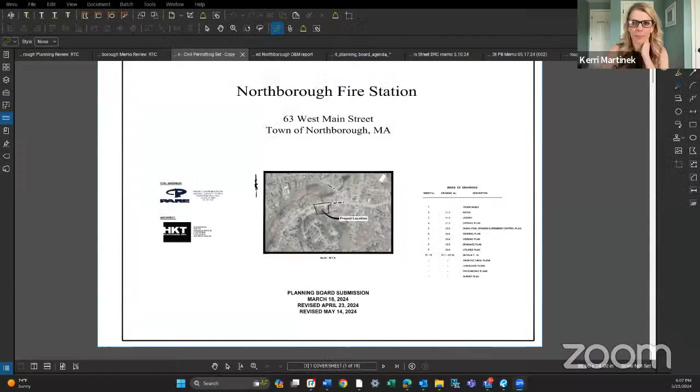When we last left off, we took a look at the plan and we had some items that were going to be looked at for revisions, and then come back tonight and take a look at what those revisions consist of. So if you want to start there with the revisions from last time, that might be a good place to go. Okay, yeah, I can go through the plans that were revised. Is my screen sharing? Yes. Okay, yeah, so we did submit revised plans on May 14th and written responses to all the comments we had received. So for the plan revisions, I'll just go through them kind of one at a time.

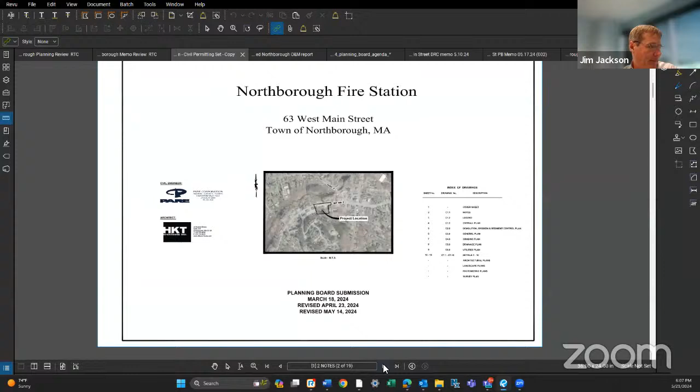One of the comments was that we weren't showing the existing utilities on the 100 scale plan, and those have been added to the overall plan, so we do have that covered now.

Next comment was regarding the crosswalk. Originally we were talking about removing this crosswalk, but based on the discussion we've decided to keep it as is, so we've taken it out of the demolition plans.

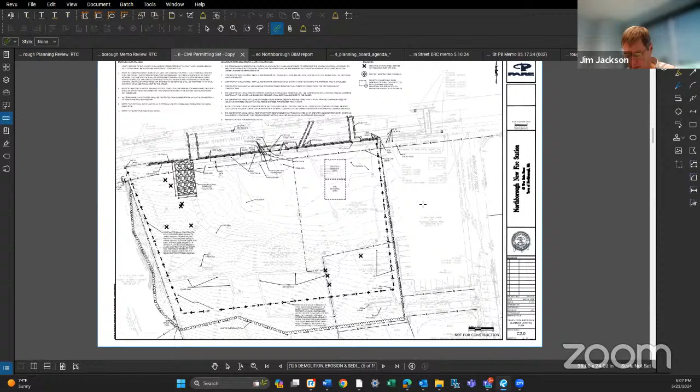We had a comment on marking the public parking. What we did over in this area is we've added a public parking sign at the entrance to the public parking.

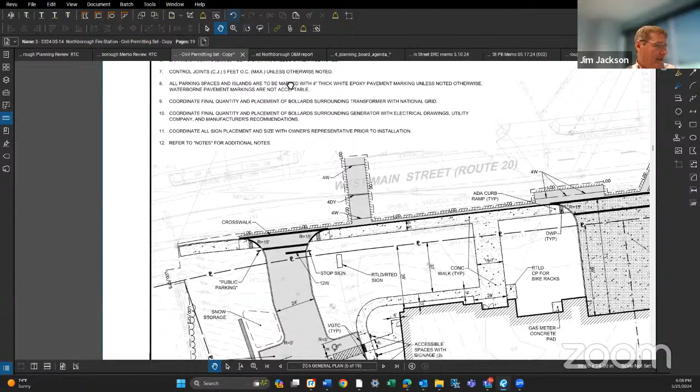And then we have marked 6 of the spaces that will be reserved for fire department use, marked with signs - that's 1, 2, 3, 4, 5, 6 spaces restricted just for the fire department. Then there'll be about 30 spaces open to the public, and of those 30, 3 are ADA accessible, and there's also 4 EV charging spaces. So the ADA spaces and the EV charging will be shared by the fire department use and public use.

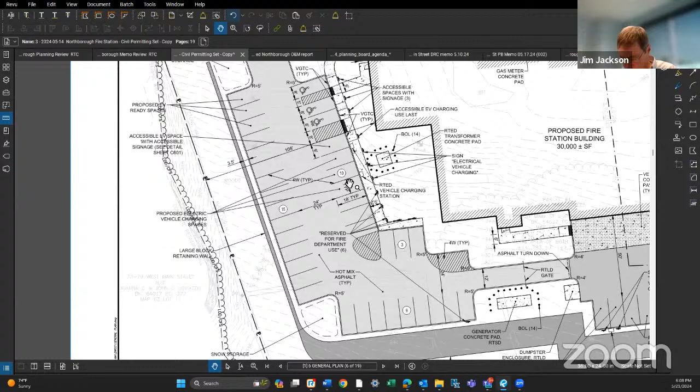Grading plan - we had to raise the curb height along the east side at these entrances, so we've raised that to 7 inches.

There was also some discussion about revising the grading along the Hillside Grill property. The fire chief and DPW director have discussed this with the property owners. It's not finalized yet, but we've discussed doing some grading on their property, which lowers the height of this wall along the west side of the property to about 20 feet - a significant reduction in wall height. We also did the grading between the 2 properties.

Did have a question on the landscape plans. Any questions from the board? I have a quick question.

Are you saying that the abutting property has agreed to the grading plans that you guys are doing? It's been discussed with them - I know the chief did discuss it with them, and I think there was a positive response. I don't think there's any final formalized commitment from either side, but it has been discussed and it seemed beneficial to both sides.

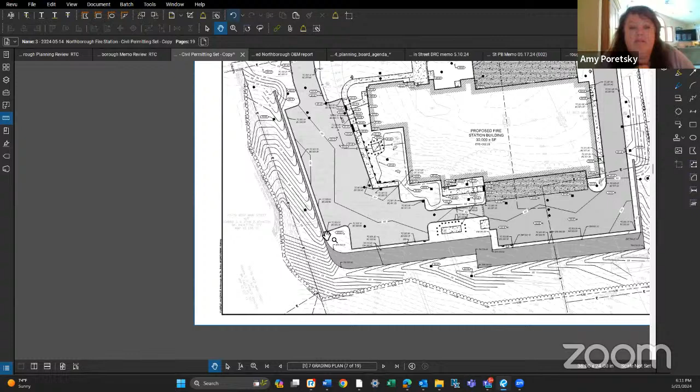And how far does it taper down as it gets to the road? It basically tapers down to really nothing, just a couple feet high, and then the grading takes over.

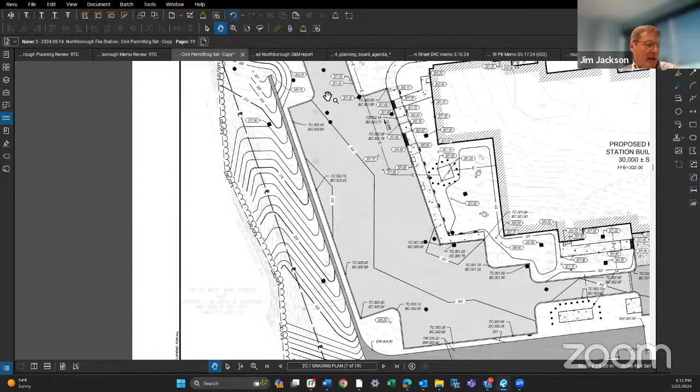So at this corner, would you have to do anything with the pre-existing sidewalk, or not? Right now we're showing the existing sidewalk - the proposed sidewalk is right along the roadway. When you say existing, do you mean the Hillside Grill existing sidewalk? Yeah, we're not showing anything on our plans for that.

We did see in the draft order of conditions there was a condition where we'd be required to extend the sidewalk down to the driveway. I think we'll discuss that tonight, but we haven't changed our plans for that yet. But if that's in the order of conditions, that would need to happen. Thank you.

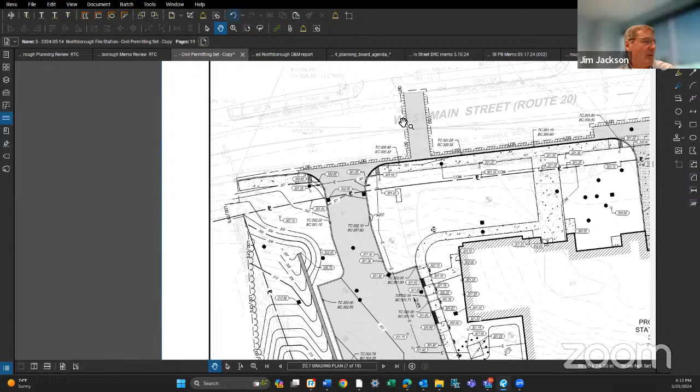Now, is that a crosswalk right in the front too? I know Fred had asked questions about crosswalks and I see one right there. So there's no - this is just repaving for utility connections. We aren't adding additional crosswalks, we're just going to keep that existing one.

So originally you were going to discuss crosswalks with Fred. That's what you discussed with Fred, and he also thought that was fine? Yeah, we discussed just keeping that one, because at the time he made the comment, we were calling for removing that one, and we discussed it with our traffic people, and they felt it was okay good to keep it.

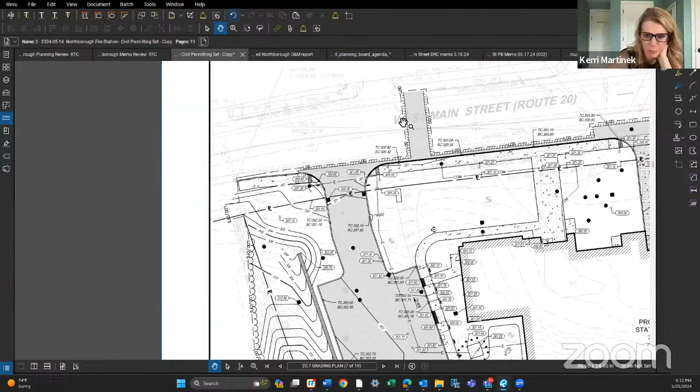Can you point out where the crosswalk is? It's over by Avidia, down by the bank. So there's no crosswalks in front of the fire station? No, there won't be one in front of the fire station.

We were thinking it was too close for the mid-block crosswalks. It's not in an intersection, so the traffic engineers try to limit those, because they can disrupt traffic and be a little more dangerous.

While this was up, I noticed Fred had a comment about lining up the driveway with the driveways across the street. Did you guys work that out? Yeah, so that was on the draft order of conditions, and we did want to discuss that tonight.

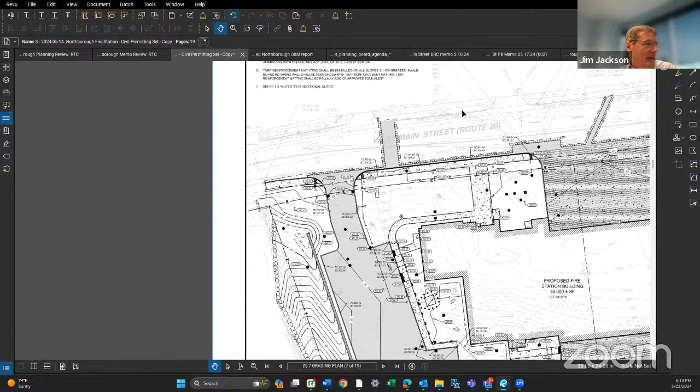And that's in this area, so here's where our driveway is now. We haven't done any revisions to the drawings, and here's where that Dunkin' Donuts driveway is. There's actually 3 driveways that serve Dunkin' Donuts. There's this one here, this one here I think is an exit, and then right at the edge of the page there's another one, I think the exit for the drive-through.

And we're kind of lined up offset from this driveway here, and that's what the comment was. They'd like to see it straightened out, and we can make it happen.

We just didn't think the alignment was great, so we'd have to put a bit of a turn. We want to hit at 90 degrees to West Main Street, so we'd have to come in like that and then cut back to get back to our parking area. It was a little bit awkward. It could be done if it's required.

We were hoping to wait until we got to the Mass DOT permitting stage and discuss it with them, and then if they recommend it, we would follow through with it. But if they don't really feel it's necessary, maybe it'd be better to keep our alignment a little bit better in and out from our site.

So Lori, any insight on why Fred suggested the non-emergency driveway access should be aligned with the driveway across the street? Do we know why he wanted that? Yeah, he and I discussed it. Personally, I like to see driveways offset, so I questioned him why he wanted it directly across from this driveway.

And he thought there would be a significant enough volume of traffic going between the two facilities. He was also concerned about the cross movements and the potential for collision. So if somebody was to cross the double line to go into the fire station versus cross the double line to go into the Dunkin' Donuts, and they weren't paying attention, he was concerned they might collide.

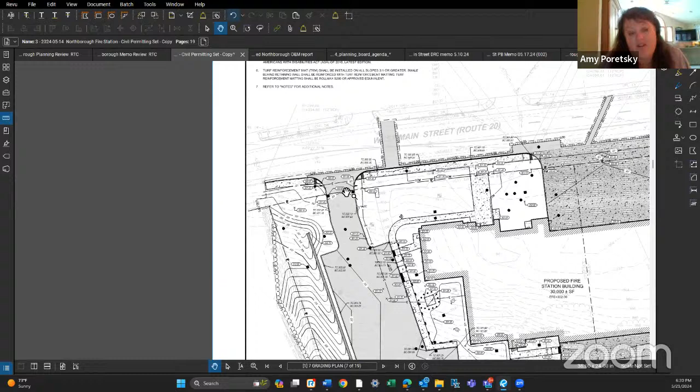Yeah, I've had a lot of experience with the traffic engineers from Pare, and I find them to do really quality work. Because they're working for the town, I would expect their opinion would be based on protecting the town. So I personally would feel comfortable with that. Would it be okay if they also talk to Fred? I hate to override the town engineer. Maybe they could talk too—that could be part of the condition, that Fred is in agreement.

And there will also be the Mass DOT review of all the curb cuts, so they do have to approve those also. They want it aligned, we would say.

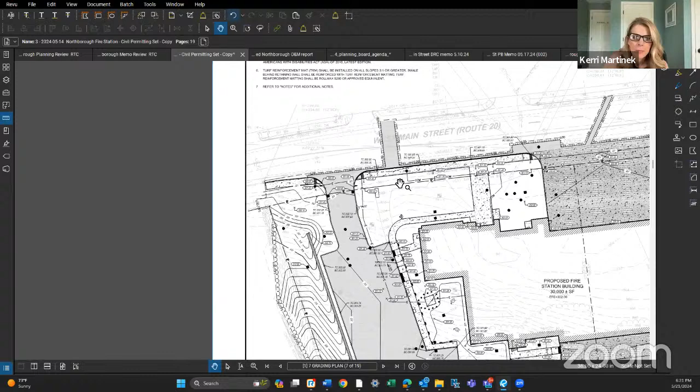Okay, anything else there? Yeah, we did make some revisions on the landscape drawings too. We changed the fence to 5 feet high, and we also added some detail for the dumpster enclosure. So we're proposing this block and brick structure with solid gates.

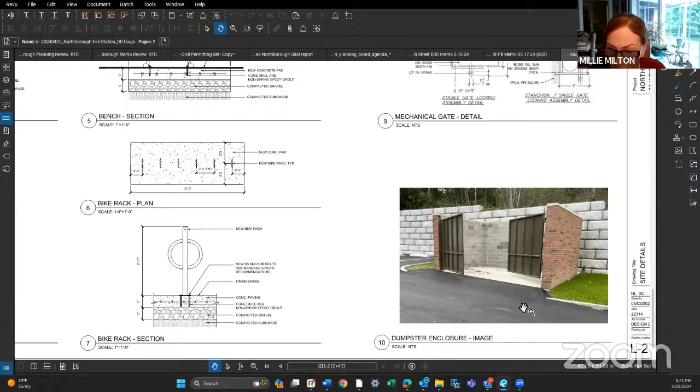Can you show where the monument is? Is there a monument or memorial image showing where that is? Let's see—this memorial, so on the plan, maybe at the front of the site. Yeah, the memorial will be right here at the entrance. Okay, I didn't see that. Okay, I see it now. Got it, thank you.

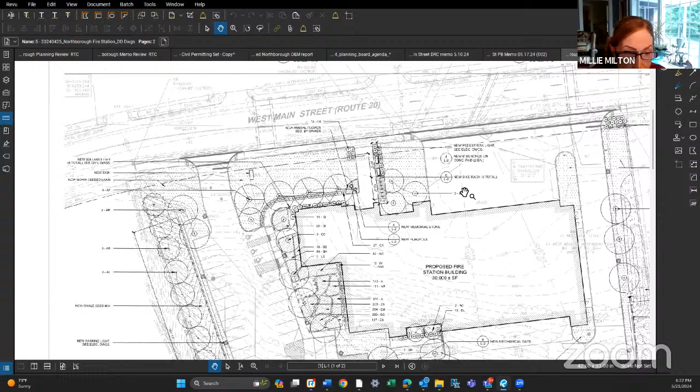And I believe that's the significant changes that we made to address the comments. I know we can't see everybody, but I just saw the chief had his hand up. Oh sorry, Chief, do you have something you want to add there?

No, Kerri, I was just going to point out that that's the memorial that currently sits on the corner of Church and Pleasant. I spoke with the Eagle Scout about the project, and he's all for moving it. I just need to finally connect with the Scoutmaster, hopefully do that Memorial Day since we're walking with each other, and get their approval. Our intent is to move it—I think we'd get much more traffic there as opposed to where nobody sees it.

Okay, so I see you also submitted responses to comments, and on top of that Fred had his comments based on your comment. So did you have a chance to see what Fred submitted? Is that the right order? Did I get that order right?

Yeah, we saw Fred's original comments and discussed them with him, then sent in a written response. I don't believe we've seen a response to our comments. I'm sorry, I thought I sent those over—I can send them now. The few outstanding comments were included as conditions of approval, and I definitely sent the draft conditions over for them to review. Okay, so Laura, you had this all covered. Hopefully. Yeah, we do have the draft conditions of approval. There were a few we'd like to discuss, but most of them were fine.

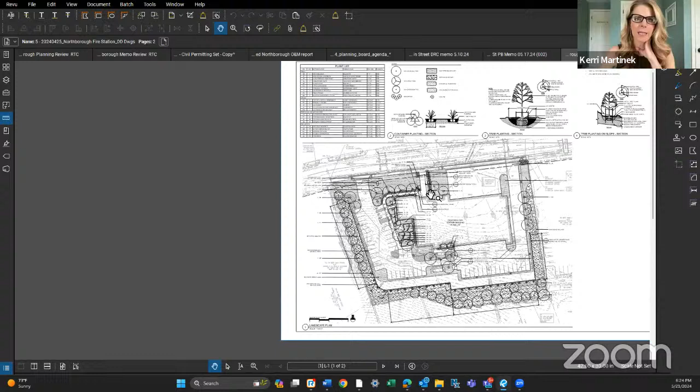Hi, we do have on the drawings, we are calling for snow guards on the roof, on any of the sloping roofs. So there would be both pipe rails and pad style snow guards that would prevent snow from sliding off quickly and causing any issues below.

Did you also say that the doorway is set in from the building? Yes, that's 4 feet deep, correct. Yep, the doorway is set back 4 feet from the facade, so someone steps into the protected covering before they open up the door.

I could also speak to the design review concerns. I know there are snow guards, and I think there are snow guards on top of 4 West Main Street too. But when there's a big snowstorm, they still had to put up all sorts of scaffolding, and it's concerning because there are metal roofs, even though there's snow guards. I was up at UNH once, and they had to put fencing and signs around, be careful, because when the snow slid off, it was like it could have killed someone.

Yeah, and I did drive around and take pictures of structures. I went up to the Westboro Fish and Wildlife, and they have roofs, similar metal roofs that slope this way, and they had a building that jetted out over the roof. Part of their building jets out over the walkway.

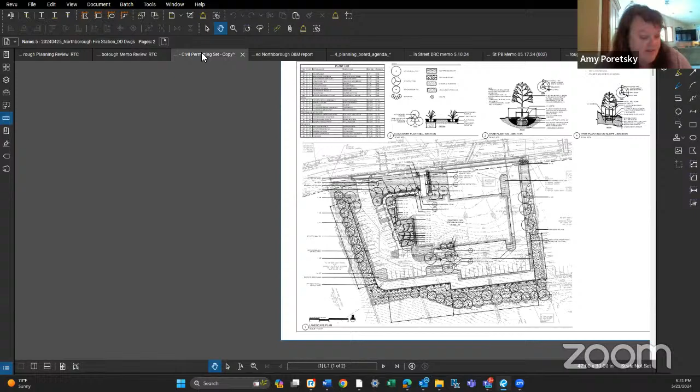How about the apron on the front of the building—is that 65 feet from the road to the building now, to the doors? Janet, do you know? From the road, edge of the road? Yep. I think it's about 65 feet, but you see how it has all the dots on it now?

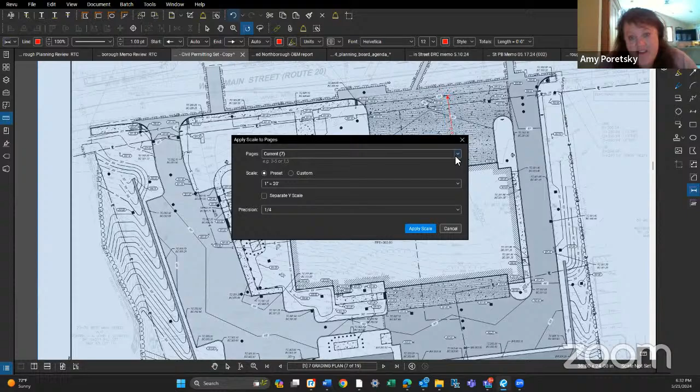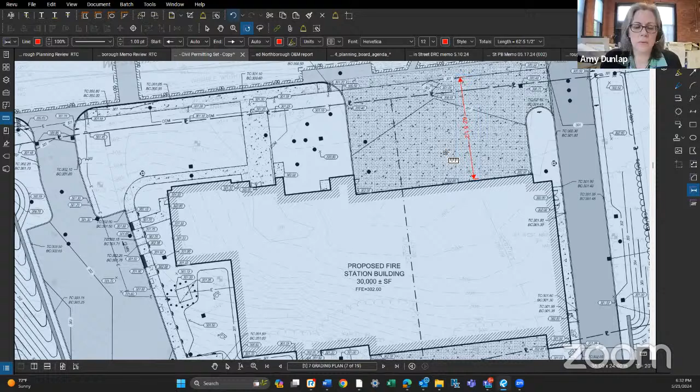Does that mean that whole area is now going to be heated? No, that's the concrete, so that'll be a concrete apron as opposed to the gray over here that's bituminous. So it just means it's concrete. Do you know how many feet of that will be heated? If I could, it's 10 feet on both the front apron and the rear apron, that's what we have discussed with the department.

I was just thinking because we were talking snow removal, so I didn't know if all those dots meant you were going to heat the whole 65 feet.

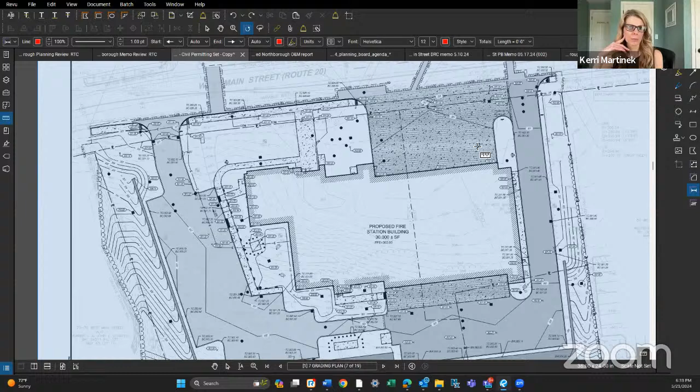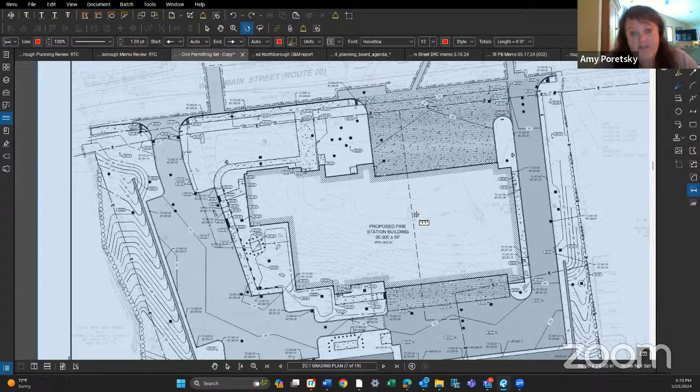Okay, let's see. Anything else, Amy, from design review? I think that's what's on the letter here. I don't have the letter in front of me. I just know that it seems a little tight. We had concerns about the height of the wall and the whole site itself being pretty tight. But I think I have the letter if you'd like.

So the first comment is a recommendation to waive having the grass strip in between the sidewalk and the roadway, Route 20. The second issue is about the wall, safety and aesthetics. We appreciate the fence was adjusted to be 5 feet tall, but overall the wall is a concern. The third comment is the site looks tight for snow storage. We would recommend a letter from DPW agreeing to snow removal if necessary, and also would request review of the water retention diversion systems to make sure they are optimal for the site.

So both Fred and Vinny have been looking at the stormwater systems, and there are some conditions related to comments received from those individuals. And number 4, we discussed adding a protective structure over the door. So that's what we've already discussed. So just those 4 comments.

Okay, Amy, anything else from your perspective? No, we had other comments, but the fire station building committee had already made their decision, so we couldn't go backwards. So those aren't even probably worth going into. This is the design that was brought forward to us.

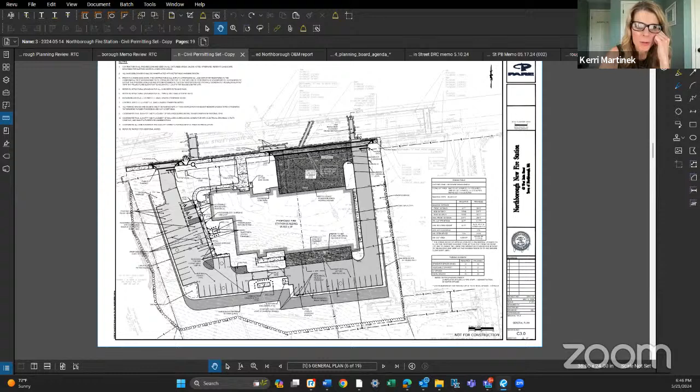Right before Dunkin' Donuts entrance. Is it before the entrance or at the entrance? Sorry, I can't see, is it between the two exits? I can zoom in a little bit. Okay, so the merger of the streets is actually between the two exits.

So at the same time, across the street from the driveway is the merger of two lanes. Yeah, that's a little messy. I just think site-wise, that's a concern.

Because you always have somebody inevitably who wants to speed past the people going into Dunkin' Donuts. So there's that, the speeder going past that. And there's the merging of the lanes where people also try to speed ahead of anybody going slowly. And you have people coming eastbound trying to get into Dunkin' Donuts.

I was going to say the same thing about blocking off the fire station entrance, because you can't well get in. Not only that, but you get people coming eastbound saying 'oh there's the Dunkin' Donuts,' looking over and not realizing there's a building and cars coming out on the other side. I think this is a tricky spot.

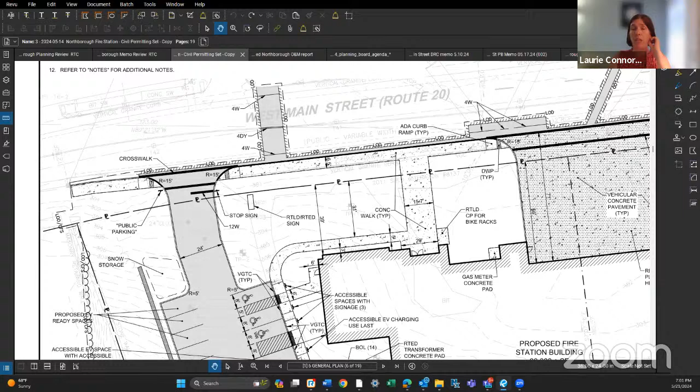And for the public, I wonder if Jim could speak to how they enhanced the vegetated buffer to address the comments received from 20 Monroe Street at the last public hearing. Sure, I can call up the landscape drawing. So here's the plan. The question was from Monroe Street over here, and we did add some more trees up above the retaining wall, which will kind of buffer that area.

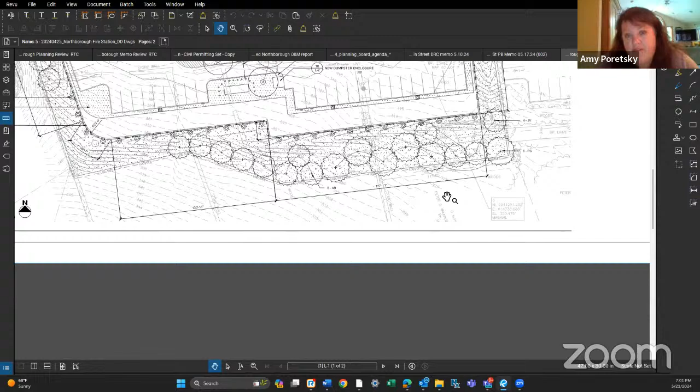Now those trees where you show the circle, that's full grown, right? Because they're smaller when you first put them in. Yeah, they're kind of schematic. The sizes that will be planted are all in the planting schedule. They're kind of schematic there, but they will fill out. So they're about 6 feet being planted, but those circles show about 20 feet of tree when it's grown up to 20 feet.

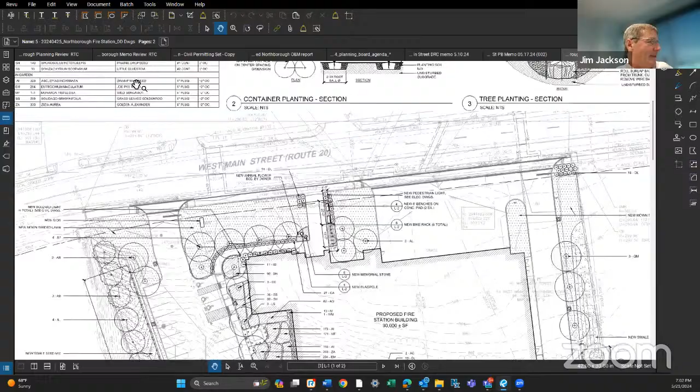Yeah, I'm not the landscape architect, isn't on tonight. Oh okay, someone else pointed it out to me, so that's how I know. So they won't fill out for about 14 years, but there will be trees there. They start at 6 feet, and when they get to 20 feet, I was told it's probably 14 years from now.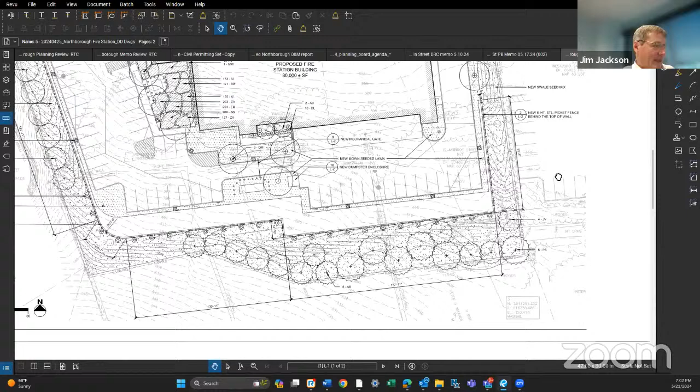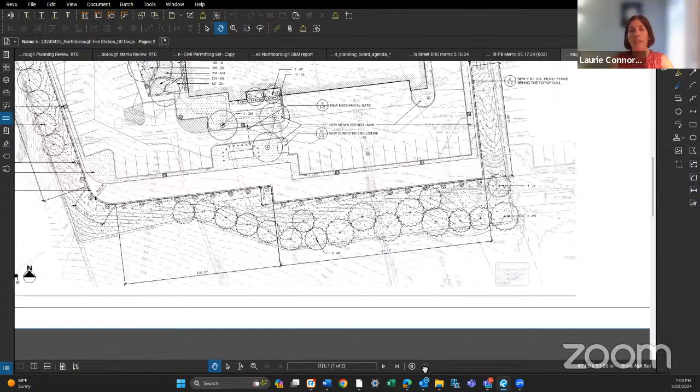Above here, there's some wooded area that we will leave in place, some trees. So Amy, when they do a landscape plan, they space the species to take into account their mature size, because otherwise they would overpack them and crowd them and the plants wouldn't survive. So usually they give the distance on center from where the various species will be planted.

I guess some people might get confused too, because when they see the tree area around the outside, it looks like they're really big right now. Not that I'm recommending really big trees, I'm just saying they're not as big as it might look. Those up there are calling for 12-foot height pine trees. They're decent sized trees when they start, but they...

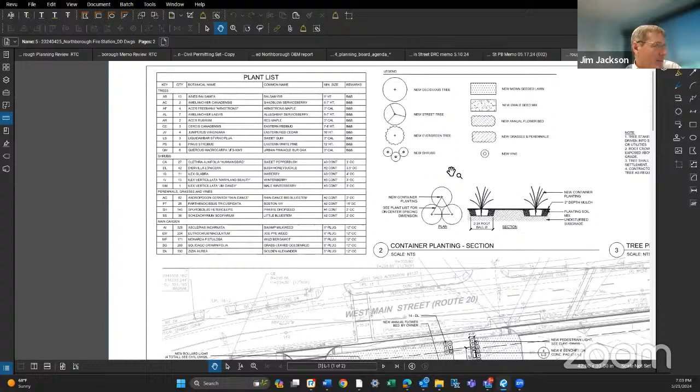Okay, anything else on the buffer?

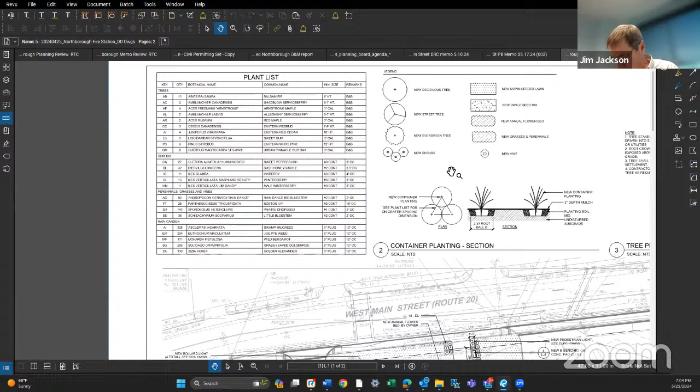So the other question we had was on the sidewalk, extending it to Hillside Grill. There is an order of conditions to extend it about 150 feet. And while we certainly do, it does add project cost. We'll have to get our surveyor to extend the survey up to that area, do a little additional design work, and then there's the construction cost for that sidewalk and possibly a small retaining wall because it is kind of steep in that area.

So just wanted to confirm that that's really necessary. It does add cost. I'm wondering if we do leave it out, like we have a complete streets grant that I don't think we've used yet, have we, Laurie? Maybe after the fire station or even before, we could use that grant to do that little section versus adding to the cost of the fire station project.

I was hoping to use the Complete Streets grant on the Pierce Street project, Pierce and Blake Street project. So I'm not sure if there will be any money left over.

And I would agree, I would think so. You've got all the equipment there for the most part.

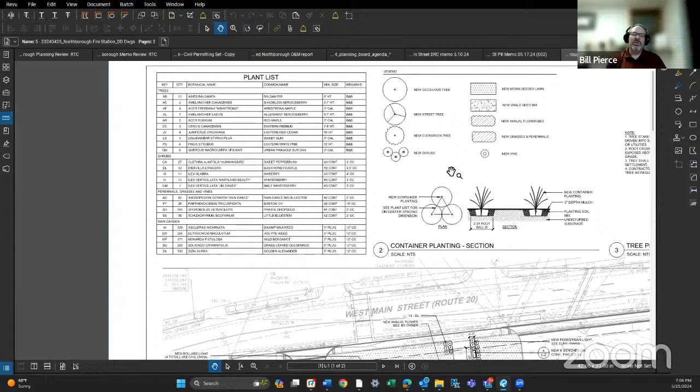I think the other issue too is that the original plan had the sidewalk going up the hill to Hillside Grill and connecting up there, right? And the concern with that is you've got a slope, so in the wintertime that becomes icy, and that sidewalk basically becomes unusable. So by keeping it at the same level going along Route 20, you're eliminating that slope.

Right, especially for, we had talked about too, like at the design review for ADA compliance, it makes it tricky to go up the hill. But then it also is ending at the Hillside Grill parking lot with no sidewalk there. Yeah, but I think that's the same either way, right? That's a problem of Hillside's, not of the fire station.

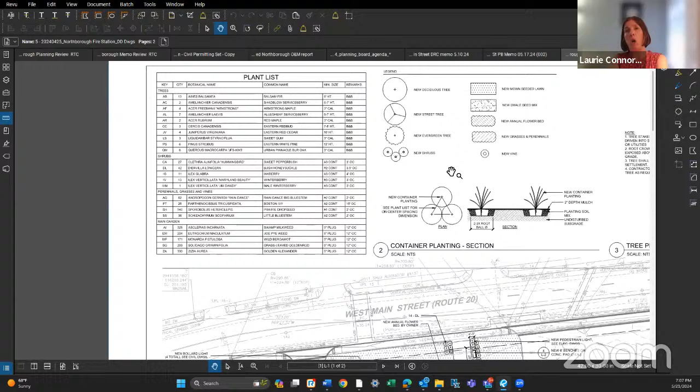I just wouldn't want to add to the price, I feel, but it's up to everybody else. So I figure, when you're talking about a $45 million project, this is pennies comparatively to the overall scope of the project. And like I said, it will be cheaper because they're already installing the sidewalk along Route 20, so it's just a matter of going a little bit further.

Did the fire station building committee talk about it at all? I know Dawn is in the audience and the chief is here. Have you guys talked about this sidewalk extension?

I can speak to that, and the answer is yeah. We had concerns that going off of our site, this is the site that we have to work on, this is the money that we were planning on. If we start going off of our site, I thought that was going beyond our scope. If they want to put a sidewalk in there, that's up to the town, the town wants to pay. As we're talking $40 million projects, we're trying to get it down below 40 million. And now we're going to put in potentially more engineering, more potential small wall that has to go there, 150 more feet. Now, it may be small pennies, but I don't know.

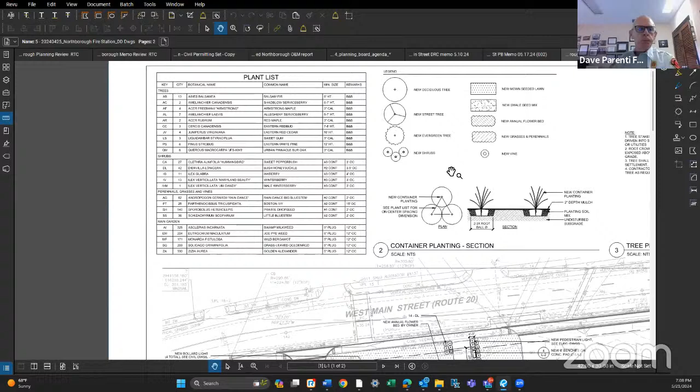That's why we had decided to go with your recommendation. Just leave it, just end it at the end. I kind of agree with that because I just don't want to add anything more to it.

Although I feel like I agree with what Laurie says, it's easier while they're there, but I know there's already talk about the price, so I hate to be adding to the price. I just think also aesthetically, it's fairly unattractive to have a sidewalk that just ends and goes nowhere, and it could be confusing for people who are trying to use a sidewalk and they don't realize it doesn't go anywhere.

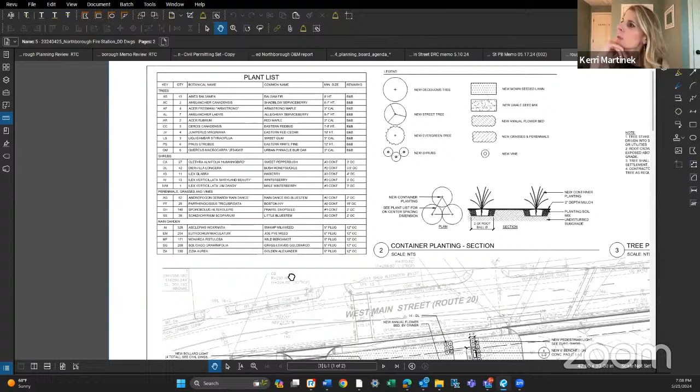Well, so I have to say, Amy, my concern is just that our job is not to cost this out, and our job is not about the price. We don't get to decide the cost of it, but we should be thinking about the site plan, like if we would want that in the site plan. But this isn't part of their site. This is off their site. This is the Hillside Grill site.

But it is allowed to require offsite mitigation. That's something that we've discussed in other projects and required in other projects.

I think my concern would be that if you end it here at the fire station, people are walking on this sidewalk. Now, to get to another sidewalk, they have to cross Route 20 to get to the sidewalk on the other side. And I think that's going to cause a bigger safety issue, especially on that corner.

I just didn't know if the town should be doing it. While the construction crew is there, the town could pay for the sidewalk versus it being part of this project. I don't know, it's up to everybody else. I just think that if the town doesn't do it, nobody's going to do it, because who will do it? And I don't see Hillside doing another one, because they already did one and kind of wasted time, energy, money there. They're like, I don't think we need to do another one.

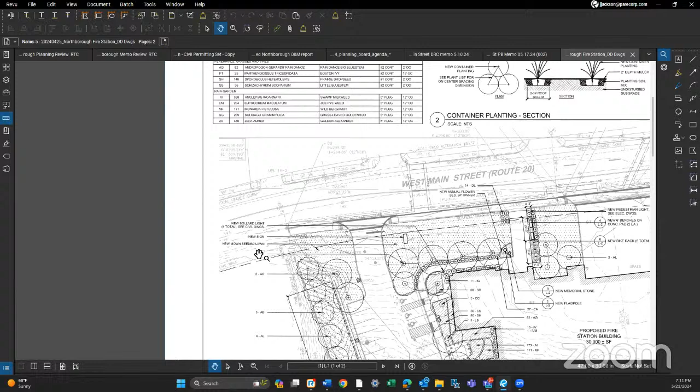Now, could a MassWorks grant go for that piece of sidewalk, Lori? Because MassWorks does stuff like that. No, it wouldn't be worth it to apply. MassWorks is a big source of funding for very large construction projects, and the cost is probably like 100,000, so you wouldn't apply for a MassWorks grant for that.

Okay, well, I guess, Amy, you are not in favor of a sidewalk extension. Millie, what is your sentiment? I am. Bill, I am. Anthony? I would say extended. Okay, so majority of the board is in favor of extension of the sidewalk.

Which is already written in as a condition anyway, Laurie? It is. I put it in red because I figured you guys would want to talk about it. And it's in there twice, but once is for design, right? And once is for the build. Correct.

And were there, Jim, you mentioned a couple of conditions you wanted to talk through. Were there other conditions that you wanted to talk through? We did kind of want to talk about the one about doing the two permeability tests.

Oh, I can't hear, Jim, we can't hear you anymore, or I can't anyway. Okay, yeah, so the other one would be condition L. Prior to the issuance of a building permit, the applicant shall submit the results of two permeability tests. We wanted to push back a little on this. We did do the design based on test pits that we did out at the site, and based on the soil texture, we were able to determine a Rawls rate that's in accordance with the Mass regs and the Northborough regs.

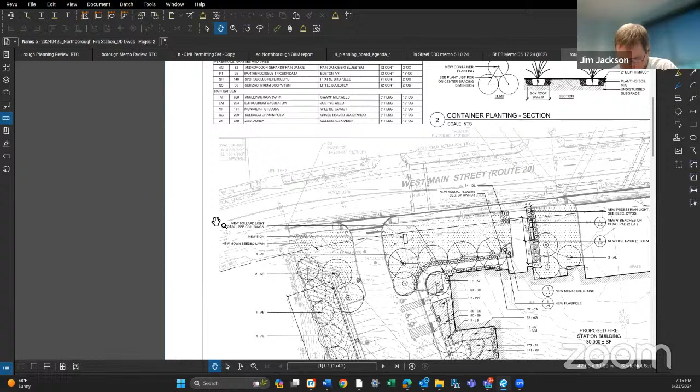I mean, if Fred and the board feel strongly about it, it's not a huge issue. I wouldn't go against Fred, because if something goes wrong, it falls back on us for going against our town engineer. So I'd stick with it.

Are there thoughts from board members? Yeah, no, I agree with Amy. Without knowing what his thoughts were on that, I wouldn't have any reason to overrule them. Yeah, I'd agree as well.

Okay, so it sounds like the board defers to Fred's recommendation there. And that's all I had to discuss. I don't know, Amy, do you have any other conditions you wanted to discuss? I don't think so, I don't think there was anything else.

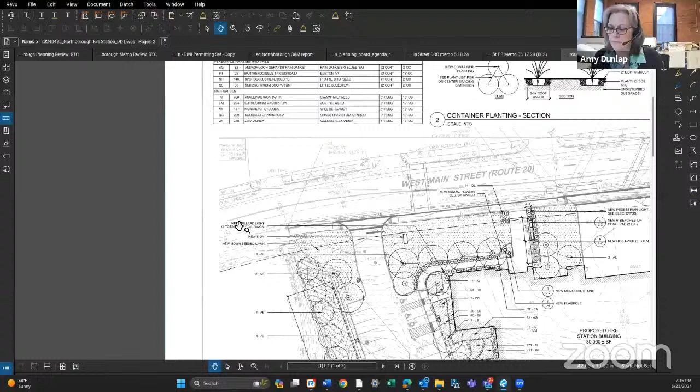Okay, so at this point then, the only outstanding piece is whether it's the building permit or construction, and then we have a letter coming from DPW. For the letter, I think we'd at least need to leave the hearing open for that to be included.

We also have to decide if we're going to add in a condition about — well, we're not waiving the traffic — so what type of traffic assessment do we want as part of a condition, or do we want it before we close our hearing? Do we want to see the traffic assessment, or do we want to include it as a condition?

What I could do is say prior to construction activities, they will provide this letter from a traffic engineer, and possibly a modification. Well, Chris, we already have the condition about a modified site plan.

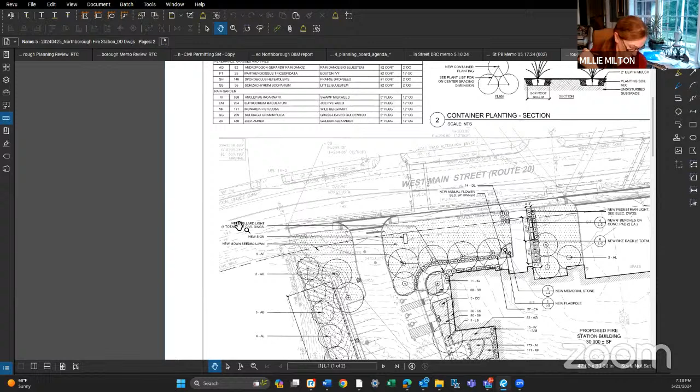Is it prior to construction — does it come back to the planning board to look at the traffic assessment, or who's going to look at it and call the shots? If you want to be the ones to receive that, I can specify that in the condition — so that would be under B, number 3.

I wouldn't mind reviewing it. That one has to do with modification of the site plan, so I could make it a complete separate condition saying prior to construction activity.

A traffic engineer will submit an analysis of the driveway alignment, and an analysis of the traffic in the area, with an assessment of lighting and turning, and hopefully someone can relay our concerns about the Dunkin' Donuts driveway and the curve.

So really, we'd be waiving the rules and regs section requirement to submit a detailed traffic impact analysis. I guess that would have to include all of the above, not just the assessment on the driveway alignment.

Remember that a traffic study typically includes turning movements and traffic count. It's quite an expensive endeavor.

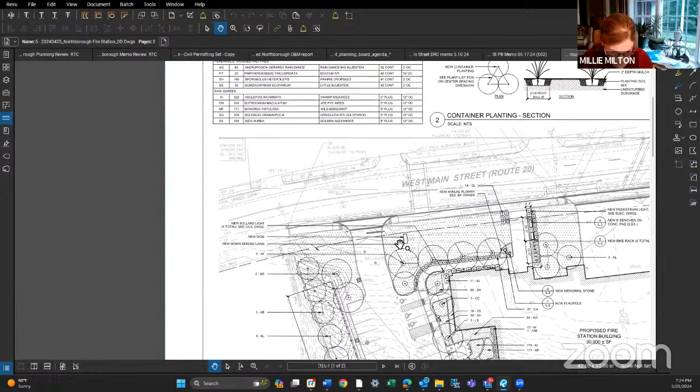Nothing that I have in my notes. Okay, so with that, when do you think is a reasonable timeline? Our next meeting is June 4th. I'm not sure if that's a tight turn for you guys, so you'll have to weigh in on what would work for the applicant.

I can say that getting an analysis done of this sort could take a while. We'll continue. I'll speak to Pare immediately, and they can talk to their engineers. We'll have to talk to the town, and then talk to the building committee about funding this. We can't do the work without a formal signed contract from the town, or an addition to our scope of work. So I'll have to get all that in line. I doubt that June 4th is going to happen unless somebody's got some miracle work for a schedule.

One thing I want to say is, could we come back at the June 4th meeting with a scope of the traffic study and then get it approved as an order of conditions that they do that scope? That way we have time to do the actual report. Right, yeah, that's another good idea.

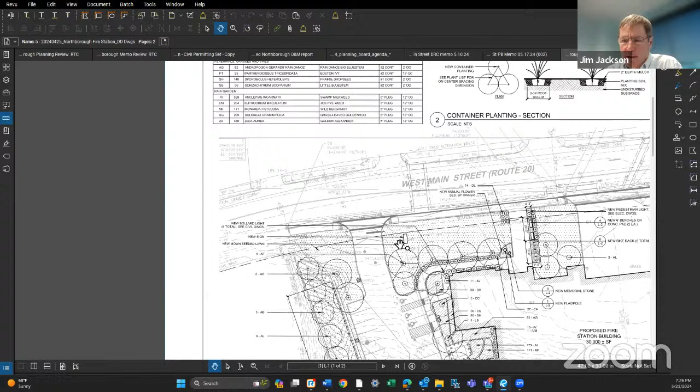Okay, is that your preference? Do you think you'd be able to vote on it without the report being completed? That's the question, right Jim? Yeah, with the scope, just vote on the scope as an order of condition. Board members' thoughts on that?

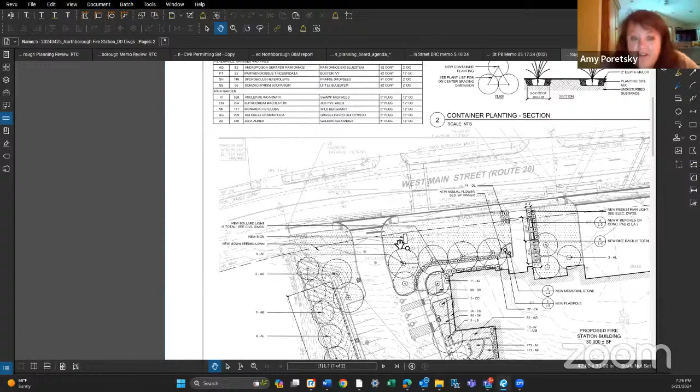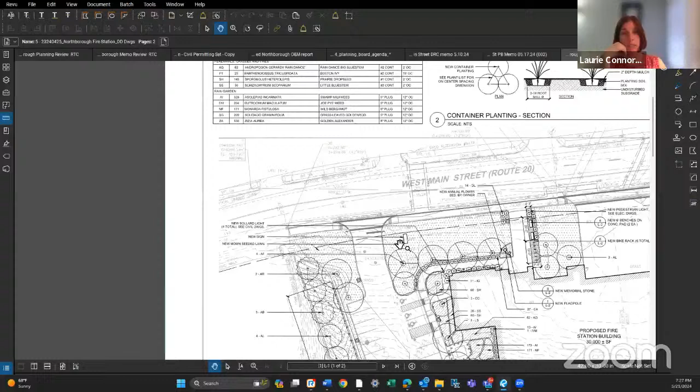It would depend on the condition. Like if there was a condition, like Laurie said, they come back to us when it's done for review. I don't know how, but I have seen it in other decisions in other towns that when something's done, it goes back to the planning board. I don't know if Laurie has ideas on how that would be drafted in a decision. I think it would just be, prior to construction activities, you will supply this analysis for planning board review and approval.

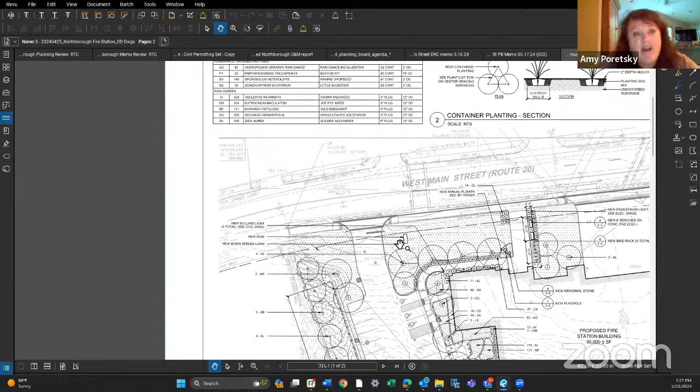And approval, okay. And then what if we didn't approve it? I'm assuming we will, I'm not trying to throw out a scare, but say the traffic study came back and said, oh my gosh, this is horrible. Then what happens? Right, so they then make recommendations, a condition requiring them to address all outstanding comments. So they would have to modify the site plan.

The question for Janet, maybe: do you have any idea what the cost of this kind of traffic study would be? No, I know that the original traffic study, which was through the DOT, was more than $50,000. So we have to see what this modified one is worth, and at the same time, PAR will probably give us a laundry list of things that they have to do.

Like we have to get a new survey, we'll have to set up to get a surveyor. I don't know, it's a busy time for surveyors, but we'd have to get the surveyor to come back, and then they'd have to design the engineering for the sidewalks too. So that would have to be approved as an extra service as well, because that's outside our scope. I think those are the two main things.

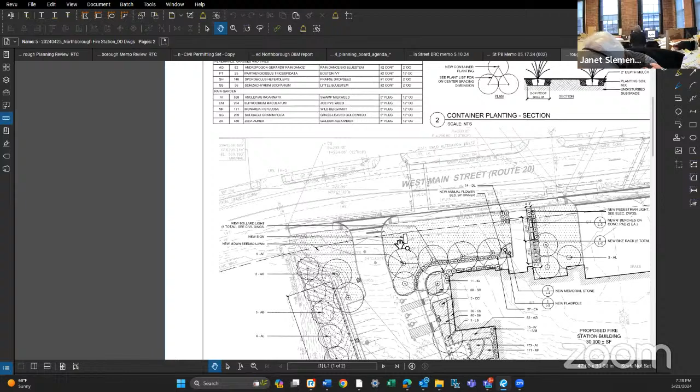Amy, you can jump in if there's other things, but we'll have to look at that. So we'll have to do that, and then PAR will have to schedule it. So there's money involved, so we'd have to go back to the committee. Safety is obviously a huge concern.

Are there other things that could be cut that maybe aren't as important as safety in this project? Maybe take a look at if there are any bells and whistles that we can cut and instead do work on safety. Is that a better approach? How can we balance the cost rather than just add? Can we figure out a way to balance it a little bit?

The money we're talking about now, Kerri, was voted on back in 2019. There's no other, that's the money we're using now for the design, for the land purchase, for the OPM. It's all the same funds that were voted on back in 2019. We're not talking about money for any of that yet.

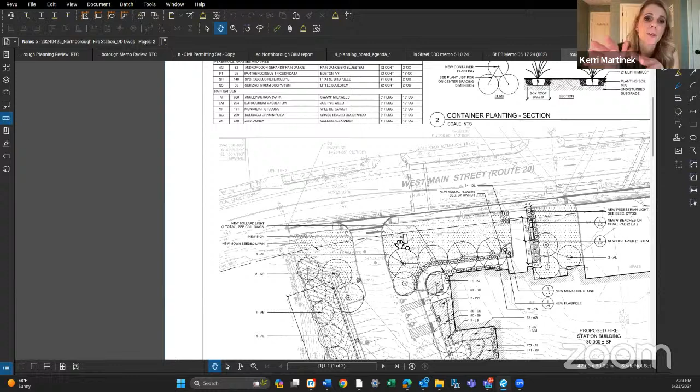Oh, like the future one? So it's just the original amount? This is the original 3.5 million that was set aside by the town to cover all these costs. Oh, okay, so the design costs, things like that. I got you. Everything is coming from the same pot. Yep, gotcha.

So we've already spent the 3.5, this is additional on top of that. I have to talk to our owner's project manager and see what's left, because we've signed a contract with the owner's project architect. We've purchased the land, we've done some legal stuff. So I don't know exactly what we have left. I have to talk to Colliers and see what we have in there. My guess is it's going to be getting close, but I'm speculating.

I will have to talk to Tim tomorrow. Kerri, I don't know the amount. Every one of these things is different, so I really don't know. We have to get multiple people to get numbers up from it. I don't want to scare anybody, but I'm just giving you an example.

So we're going to continue working on the project, moving along, because we're moving into construction documents in the next 2 weeks. So we're going to continue on. The building's not going to move, it's not going to go away, so we're going to continue down that pathway. Civil engineering is at a point where they may have to stop doing some things. I don't know, I'll speak to them about that as well.

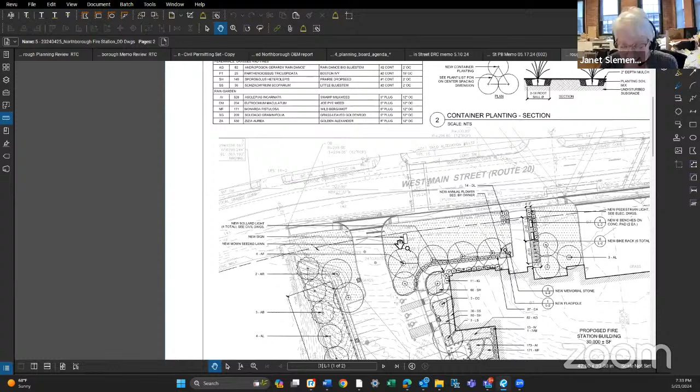I don't know, Laurie, do you disagree? It's probably best to book it. I agree - if there's a possibility that you will be ready on June 4th, I would book it for June 4th, and if worse comes to worse, you can ask for a continuance. Jim, if that's okay with you guys, Nicole, you're doing the work? Yeah, that's good with us. Okay, book us for June 4th.

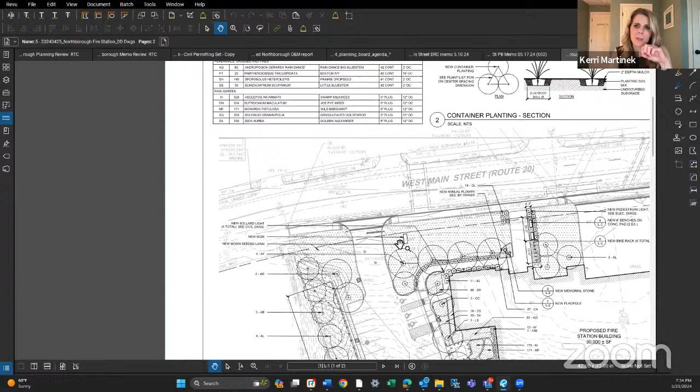Is there a motion to continue the public hearing for 61-65 West Main Street to June 4th at 6? Laurie, do you think we'll need time before the meeting? Based on a possible executive session, we're looking for a date. The court date is June 2nd, so ideally he'd prefer we meet in executive session before then. If that's impossible, he'll ask the court for a continuance. So should we set this at 6? It's better to be earlier than have a later time and have to wait, so 6 is probably best.

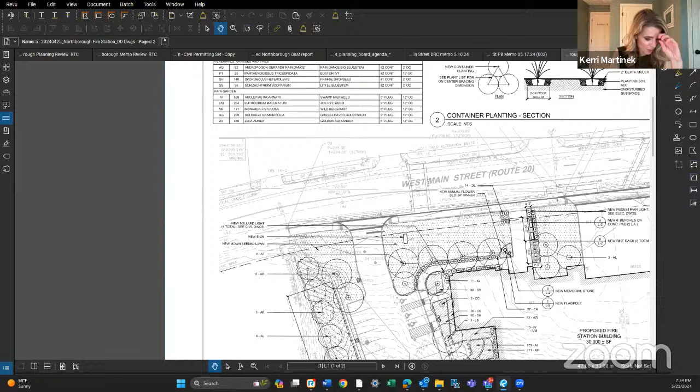Okay, back to the motion. Is there a motion to continue the public hearing for 61 and 65 West Main Street to 6 p.m. on June 4th? So moved. Second. All in favor: Bill aye, Anthony aye, Amy aye, Billy aye, Kerri's an aye. Okay great, so we're going to continue the hearing until June 4th. And if something comes up, you can always submit a letter to Lori to request a continuance.